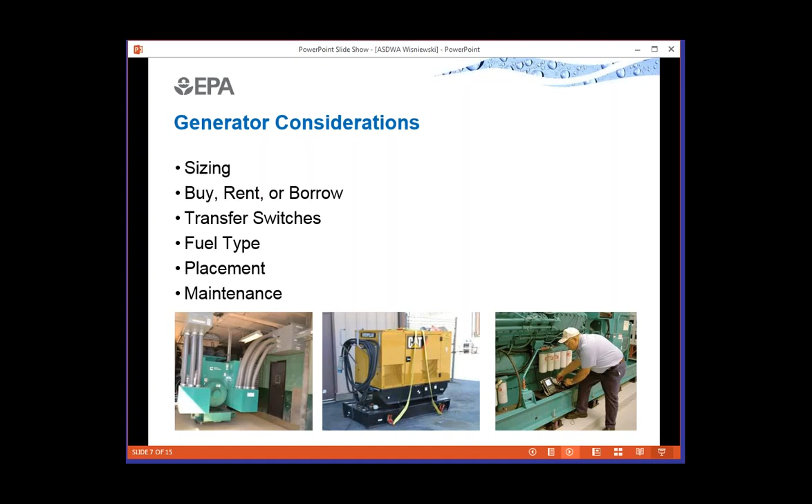Some things we've learned from utilities that you could share with utilities in your state, and with the state EOCs or state emergency management agencies as you collaborate on this effort: some utilities found it was actually helpful to go off the grid proactively before the storm. There are 3 phases of power, and if there are disruptions to one of those phases, or flickers, that could actually damage electrical equipment. So if there was a good sense that power might be lost, utilities found they were better off just going off the grid.

As I mentioned previously with the power assessments, that will give you information on what your generator requirements are, and to have those ready so you can share them with the EOC, even if utilities own their own generators, to have all that information available so that if there are generator failures, they can share those right away. Another key lesson utilities have learned is to have basic supplies and spare parts on hand.

Batteries, surprisingly enough, is the most commonly needed item. But during an emergency, it's going to be really hard to get extra parts for your generators, a full set of filters for your fuel tanks. Make sure you have all that on hand so you can keep things running when you need to use your generators, potentially for a couple days or longer.

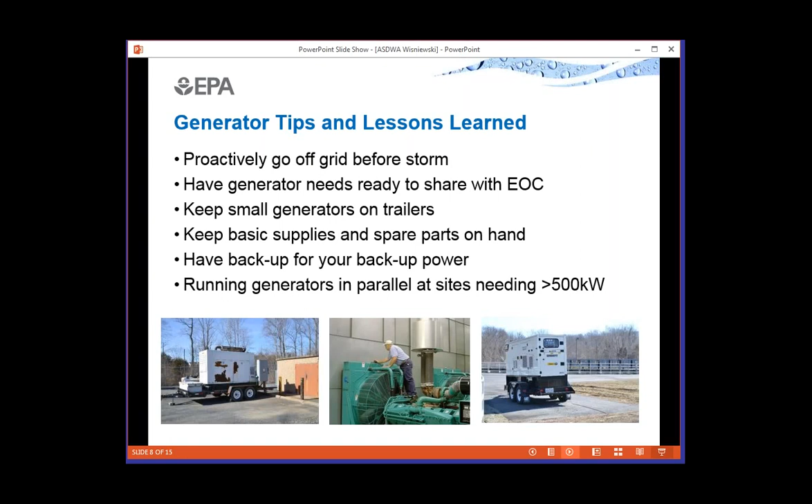Fuel storage is another critical area, particularly if you're looking at a multi-day outage, and this is where, with tank sizing, utilities need to think about how many days they want to be able to run their generators without refueling.

Think about the various locations, and whether you'll have the ability to move fuel from one location to another. These are all challenges, especially after a storm where there's potentially debris on the road, or your main fuel provider may be without power themselves. So it's worth checking: do they have generators? Do they have the ability to continue to pump fuel if they don't have power? And if not, do you have a plan B or C in terms of getting additional fuel?

Another big item is fuel management — you can't just have fuel sit there forever and have it still be good. So make sure that every few years you clean the fuel tanks, add gel and fuel additives to take away any biological activities, and fuel polishing units can either sit at each fuel tank or be rotated among multiple tanks.

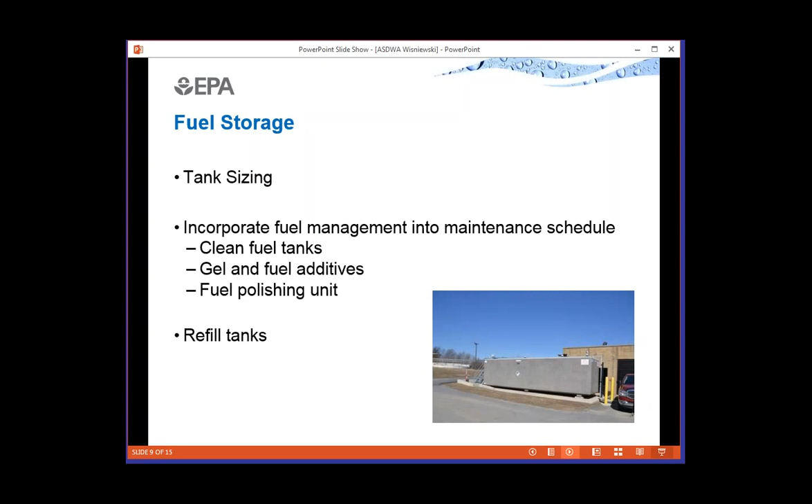And then a key thing, of course, is to refill the tanks. You may have a great fuel plan, but if your tanks are half empty when the storm arrives, then you only have half as much fuel as you were accounting for. So make sure you have a fairly aggressive plan to ensure your fuel is refilled regularly.

Moving fuel is also a big issue. Some water utilities have found that their vendors were not able to show up with their trucks as planned, and in some cases utilities have found it easier to either get one large tanker truck and go through the hazmat licensing and placard process, or use a utility vehicle with a 100-gallon tank that falls below the hazmat threshold, so they can move fuel around between locations, their storage site, and all of their pumping stations as needed.

Another consideration for utilities is to minimize their energy use. There was a utility in New Jersey that during Superstorm Sandy was able to take the entire plant off membrane filtration and switch to gravity filtration, reducing their fuel requirements by two-thirds, from 120,000 gallons a day to only 40,000 gallons a day. So there are options you can think about ahead of time to maximize the use of the fuel you have on hand.

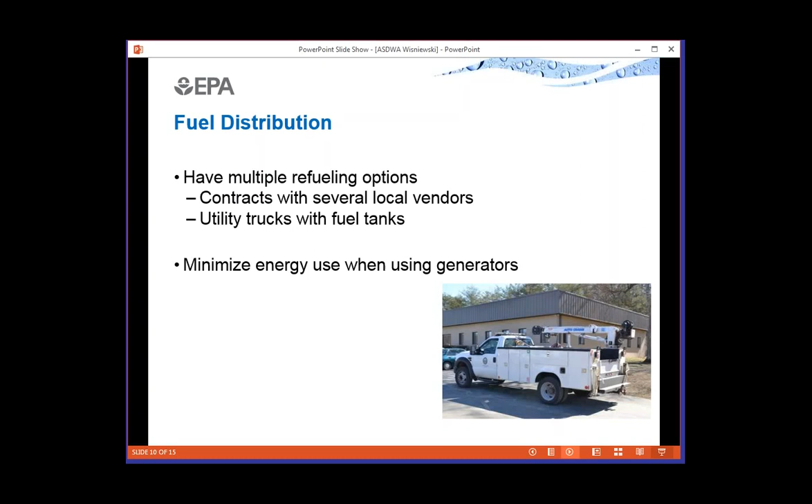In terms of states and your role with the utilities, this is information you can share with them as you engage in training and exercises, to make sure they're aware of challenges with generators and fuel, that they know their power requirements and that you understand them, and that you're working as collaboratively as possible with the electric sector, local emergency management agencies, and the state emergency management agency. In a large-scale disaster, the more everyone is on the same page with the water sector, the better off everyone is going to be.

Energy efficiency is related to this, because the more energy efficient water utilities are, the less backup power they would need, either in terms of how much fuel they would need to run their plant, or potentially smaller generators.

One of the things we encourage is for water utilities to set up energy efficiency audits with their electric providers, and sometimes state governments can get involved and help fund that. Some options include variable frequency drives for both drinking water and wastewater utilities, screw pumps in the aeration system, and even updating HVAC and lighting systems. There are lots of ways water utilities can reduce their energy footprint.

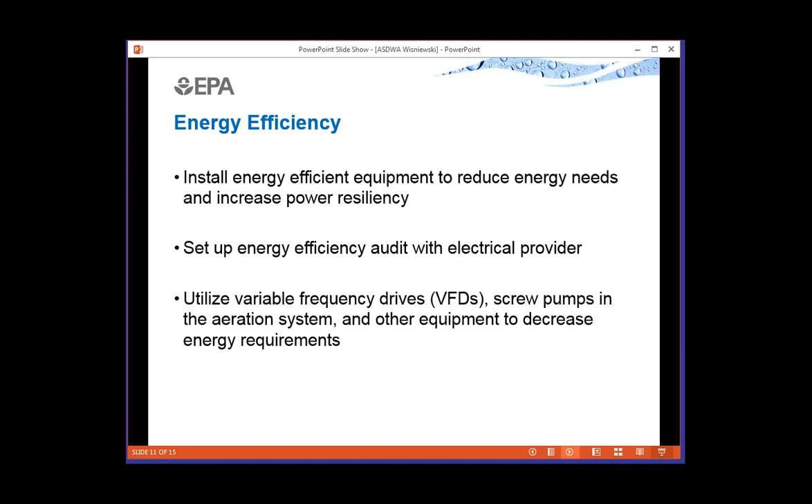On-site power is another potential way to help, not completely solve, but help with backup power needs. Wastewater utilities have an edge with combined heat and power, using biogas to produce energy on their own. Other options both types of utilities can take advantage of are wind turbines, photovoltaic or fuel cells on their land, as well as solar panels. Of course, one risk is that whatever storm takes out the primary grid power could potentially also take out the alternative energy source, but it's still potentially available.

The Power Resilience Guide also provides information about EPA's federal funds, and of course the Drinking Water and Clean Water State Revolving Funds also offer opportunities through some FEMA funding. There's potential to install transfer switches or buy generators with those funds, so we encourage utilities and states to find out what funding streams might be available to fund power resiliency efforts.

This fall, EPA will be releasing its Power Resilience Guide. Within this guide, we'll have a few videos going into more detail on some of the projects or topics, and checklists that utilities can easily print out to go through generators and various considerations. EPA will also have about a 5-minute water and power resiliency video that would be great to share widely, showing the importance of power resiliency and the steps water utilities can take to increase their resilience to power outages.

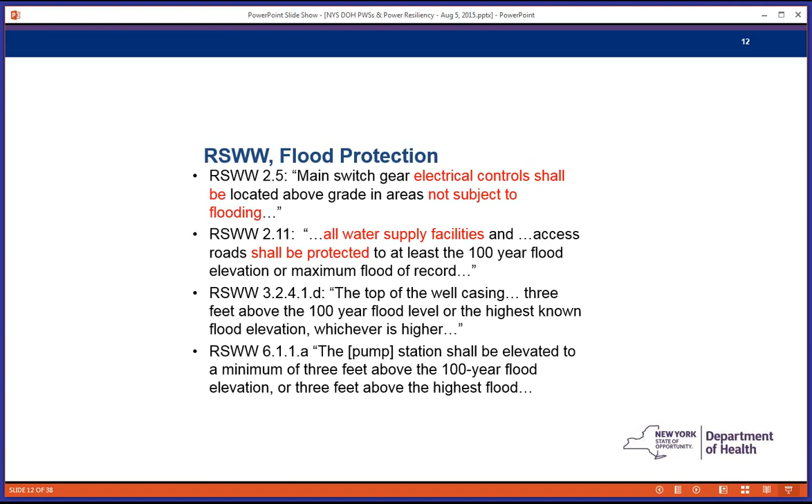So here are some wells actually being built out in a project. The casings are extended quite high because there's a stream back behind the row of trees that floods.

But of course it does no good if your well doesn't flood, but if the level's up to here, you've lost the power because that doesn't look floodproof. It looks like the new controls they were putting up, I'm presuming these are new, these look like they're a bit more watertight.

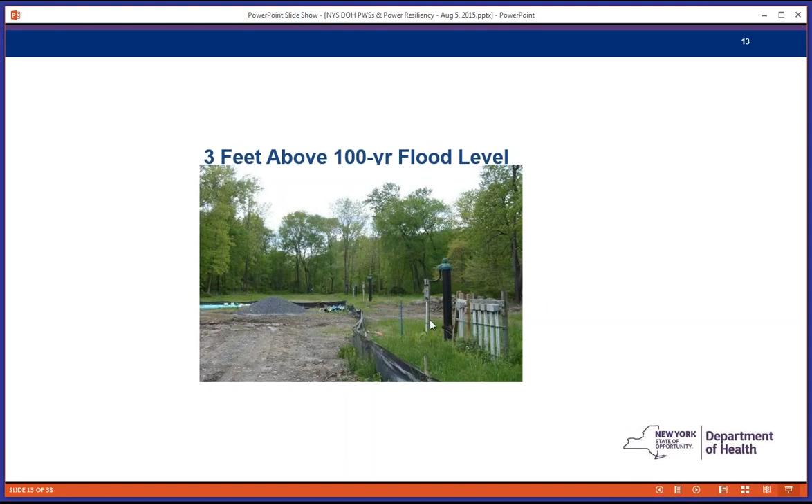So that's a consideration. Alternatively, just have your controls off-site and use a watertight sealed conduit to your wellhead that's mounded up. Now here's something, finished floor level, 100 feet above, or 100-year, it's got to be protected against the 100-year flood.

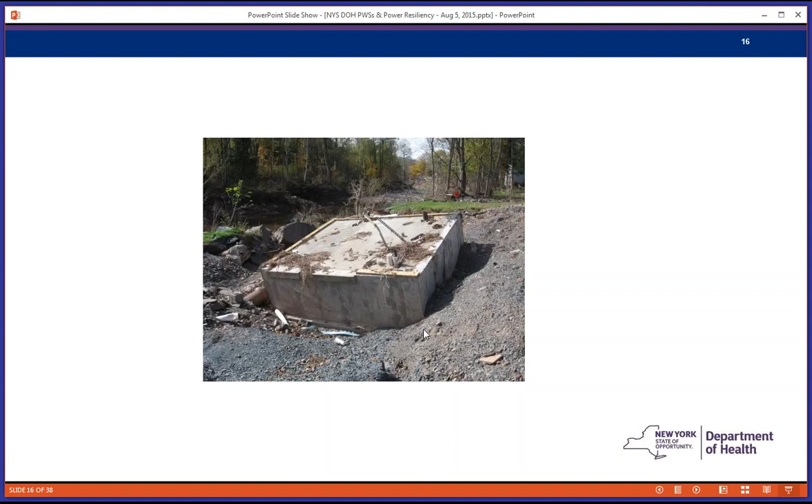Here's the building before, here's the building after. Really, the whole thing got swept away. So maximum flood of record is a new thing we're dealing with in places like after Irene, Tropical Storm Lee, and Superstorm Sandy. These are very, very stringent standards, and we're figuring out how to practically deal with those.

This is actually a system I mentioned for power resiliency. They had a good power cable coming in, and it was connected. The weatherhead was still there, still holding up, quite resilient onto the roof. The problem was that the roof was detached from the building, and the building was kind of obliterated.

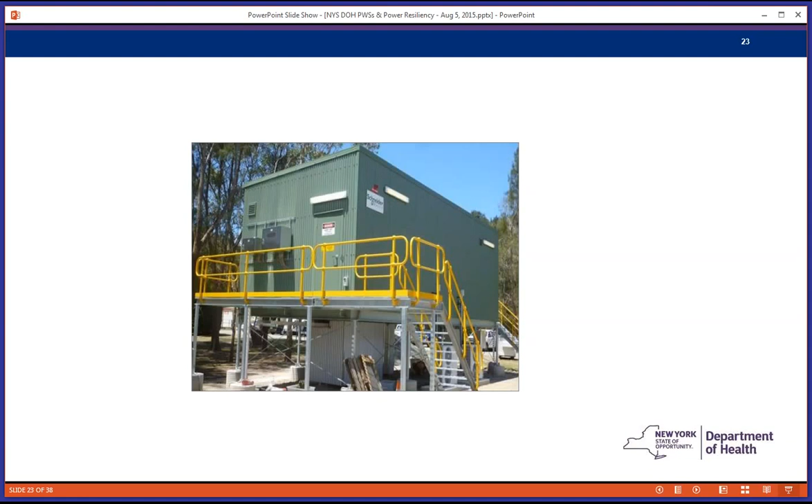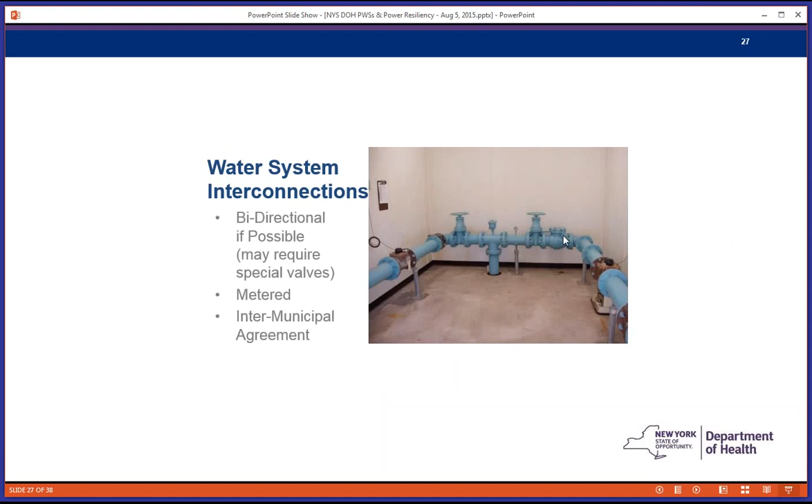Interconnections - we always encourage interconnections. There's my interconnection slide. This one happens to be bidirectional. Normally, purchase is done from the village out to a town water district through a meter, but it can be valved off, and it can go from the town if the village ever had need and the town had surplus, through the meter down to the village.

Sandy, Superstorm Sandy, definitely tested so many systems. We had a number of small water systems in Long Island. New York City and the greater metro area in Long Island were very hard hit by Superstorm Sandy, the tidal surge and the storm surge.

There were about 62 systems that had drinking water advisories. We tracked those things, 59 boil water orders, and some do not drink. Some had some serious damage, particularly the ones along the barrier island.

But for a lot of systems it was a seamless response, a testimony to the design standards and having built out well. They were very well protected, and when they lost power, the generators kicked in, the pumps went on, everything was good, and the vast majority had backup power. There were some other issues, particularly with some of the smaller systems, right along the coast where the barrier island was hard hit.

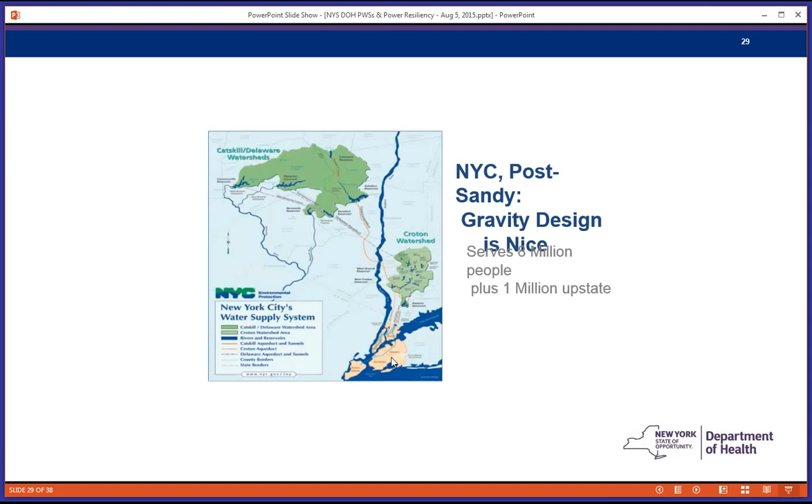New York City, one of the things we learned, Lauren mentioned gravity. Consider gravity, it's a wonderful thing. You take your water from up in the Catskills, bring it down across the river, and outside the city have a last high point, and by gravity it was able to flow through New York City. Pretty much the whole city still had water, still had fire flow during Sandy, even though the city was very hard hit and without power in many, many places.

The largest system in Long Island, which is our second largest in the state, Suffolk County Water Authority, is a groundwater system. They have over 600 wells and over 200 chlorination, combo chlorination pump stations, and a few treatment stations. They've got 55 booster pumps, 43 pressure zones, and over 100 generators, but they strategically placed those so they kicked on at the right times, ran the right pumps they needed, and were able to use the best wells and chlorination systems.

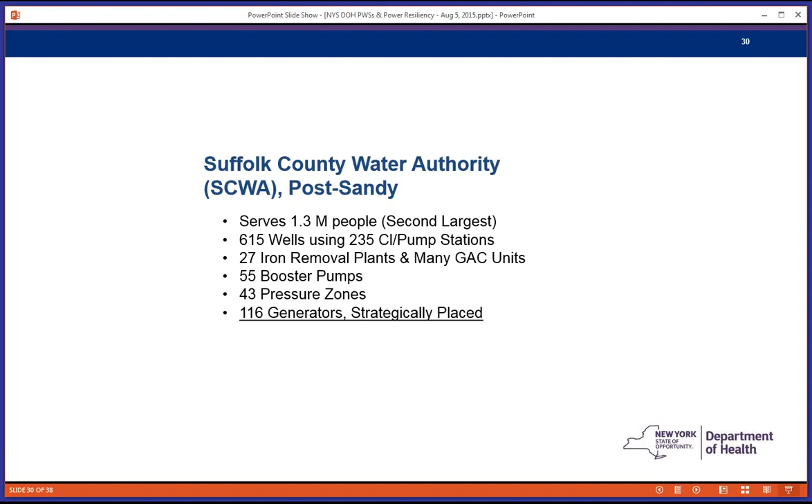The vast majority of that water system still had good water, still had adequate pressures and water available throughout their service area, which is a remarkable testimony to the effectiveness of proper planning.

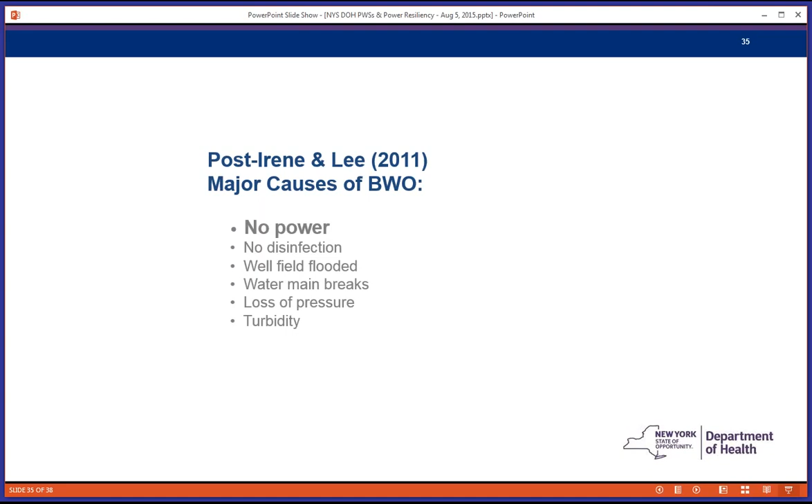Just real quickly here, Irene and Lee, we had about 168 systems impacted, 126 boil water orders, and a lot of folks impacted by that. I think relative to today's presentation, the greatest cause of the boil water orders during Irene and Lee was loss of power, extended loss of power, and they didn't have backups. Again, that's a lot of small systems. So it all points out that there's much work to be done still.

We'll continue with our VA ERP reviews for the medium and larger size systems. Continue with water system upgrades wherever we can, holding out the resiliency standards from 10 states for those projects. And whatever funding we can use, DWSRF, Storm Mitigation Loan Program, DWSRF. We have recently enacted a Water Infrastructure Improvement Act. Did I mention DWSRF? And then other dollars, FEMA, Lauren mentioned.

These are good, always good to have a carrot, you know, when you're asking somebody to do something. It could be expensive. We make these recommendations during sanitary surveys. A lot of our field people do things for resiliency, and occasionally we'll do security inspections, and we make recommendations in that context too. So thanks for your patience, I appreciate it. A lot of slides to get through, and they'll be out there, so if anyone wants to access them or my contact information, it'll be posted. So with that, I'll send it back to questions.

All right, thank you, Bill, I appreciate it. Now let's see what kind of questions we have received.

Bill, a question for you: when New York designed the new standards that called for power redundancy or standby power and auxiliary power, did you get any pushback from folks?